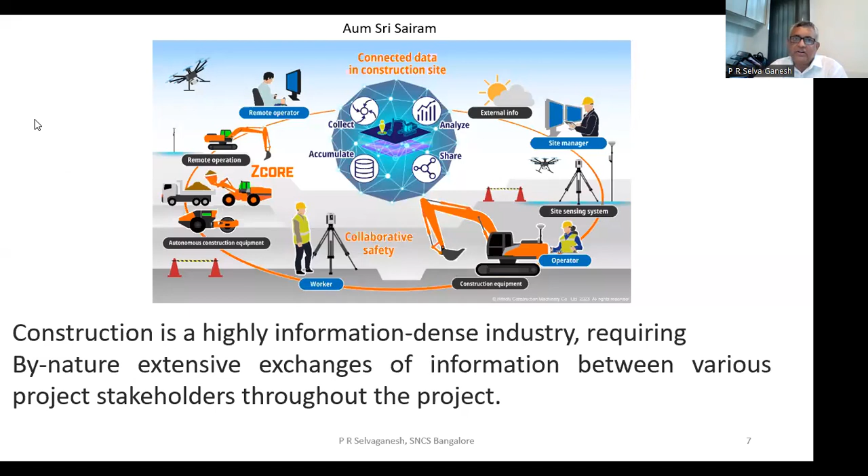It goes at a very multiple level. The idea of the owner who wanted the project has to be transferred to the last man doing this project. So there's a lot of communication, then finances and budget control, at various levels between various project stakeholders throughout the project, and a lot of information is transferred. This is where the efficiency factor of a project is measured, or it gets lost if not done properly.

Whether it is an architect, a client, an engineer, a contractor, a quantity surveyor or a finance person, the project very much relies on smooth communication between everybody.

Okay, this we know. Now I'm talking about BIM here. I'm going to introduce this technology individually, then take this lecture forward on how we can club together BIM and augmented reality, augmented reality and virtual reality, augmented reality and drone systems, and robotics. I'll first talk about these technologies separately.

A lot of paperwork happens, a lot of mailing happens. In that, BIM is a common platform, maybe cloud-based or whatever way it is. It's a multi-layered platform where all the information generated by various software—the structural engineer's software, the architect's software, the budgeting software by the cost accountant, and the monitoring software used by construction project managers, like MS Project or Primavera—various different software are integrated into one single software. That is the basic idea of building information modeling.

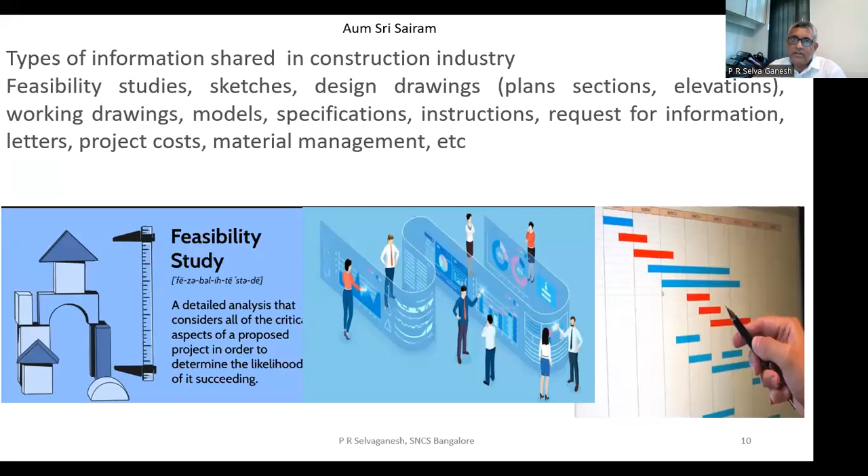In a project execution time, after giving all the drawings, they'll be asking a lot of request for informations, letters, managing the project cost, material management, like that. Lot of information is getting shared. If everything can come on a common platform in a digital form, it's very easy. All can approach it at the same time. That is the advantage of digitalization of any industry.

So what does good data exchange mean? What will happen if we do that? It will definitely give improved accuracy, administration tasks become less tiring, and improved knowledge transfer between the stakeholders can reduce a lot of change orders. Okay, I didn't mean this, I didn't mean that, making, breaking, all those things - time, energy, money - all these can be avoided.

Now, are we not using digitalized formats? Are we not using softwares? Yes, we are using softwares. Go to an architect's office, they will be using one set of softwares. Go to a structural engineer's office, they will be using another set of softwares. Go to the project site, they will be using MS Project or Primavera. Go to an accounts department, they'll be using Tally. Go to a quantity surveyor's office, he'll be using MS Excel. Everyone will be using their own software, their own template, their own unique ways of recording and presenting information.

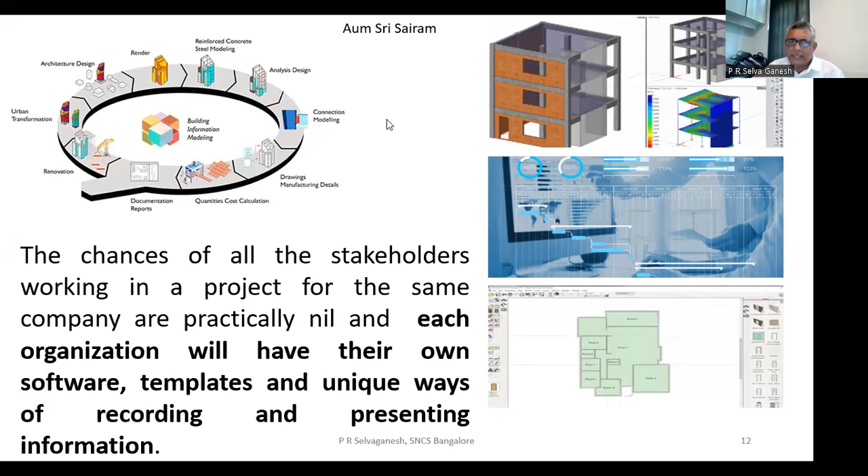This is again not a healthy practice. What if we can integrate everything together? That's what BIM is all about - bringing all the information connected to a platform, in a common software.

Now, what is this BIM layer about? Imagine I have a digital format of a project, where the feasibility study is also there as one layer, and all the drawings and specifications, the 3D models of that project are available in another layer. People who are familiar with AutoCAD know, when you make a 2D plan of a building, another layer can give all the electrical details, another layer you can give all the plumbing details.

Like that, there are many multi-layers. Imagine we have a software where the project feasibility study is there in one layer, all the drawings and specifications are there on another layer, the schedule is there on another layer, and the cost of the building is there in another layer - all in the same software.

And nowadays it is very much compulsory in European countries that the environmental data about any new project should be available, should be part of the project - meaning how much carbon emission this building is going to leave, or how much energy this building is going to draw from the environment, and how much carbon emission will be there from this building. That is very much a concern now because of global warming and other changes happening. So the products we use, the material we use, how much carbon emission this building is going to leave, and what will be their effect on the environment - it should be part of the design stage itself, part of the data available for the project itself.

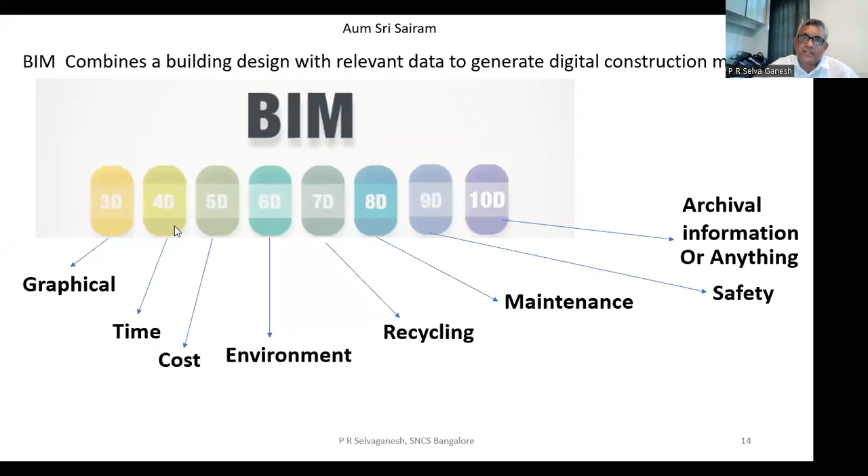Now that is about BIM, meaning building information modeling. Many informations getting integrated, that's BIM. That's one side. Now I am going to talk about another technology which is called augmented reality.

The definition of augmented reality is an interactive experience with the real world, where computer generated designs and drawings get connected to the real world itself. Now there's a thing called virtual reality we are all using already.

If you imagine a 3D presentation done on a computer on a big screen to the owners or other people, the architects come and present a building or project with 3D modeling on a screen, that is called virtual reality, because in the background they give an imaginary background, imaginary trees, imaginary people, and all those things. Augmented reality is totally different from that.

It's like virtual reality, but totally different, where the real site backgrounds are used. Wherever you are working in a project, just imagine, even before the construction has happened, the real site is brought as a backdrop, and the architect's design, the 3D model, is superimposed there.

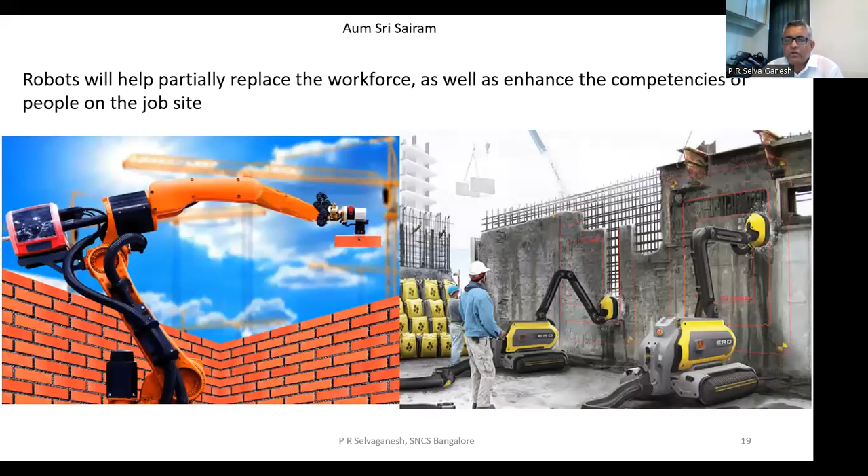See here, the robots are laying the bricks. The robo is doing the plastering or chipping. It is doing the drilling. It's doing the carpentry. CNC cutting machine is nothing but a robo-oriented machine only. It has all the x-axis and y-axis measurements. You give any drawing, and on a CNC cutting machine with wood or stone or metal or artificial material plus your own creativity, you can make wonders in the construction industry.

It is already there. Here you see a map with the light designed with a CNC cutting machine. Now, how is this happening? It is nothing but robotics only. The reference point - this is a huge board, a rectangular board, or it is multiple boards, 8x4 multiple boards. You are giving a drawing or a creative idea onto it. On the x-axis and y-axis, it goes and touches some point. It makes some holes and drills somewhere. It leaves some solid portion, creating an art piece.

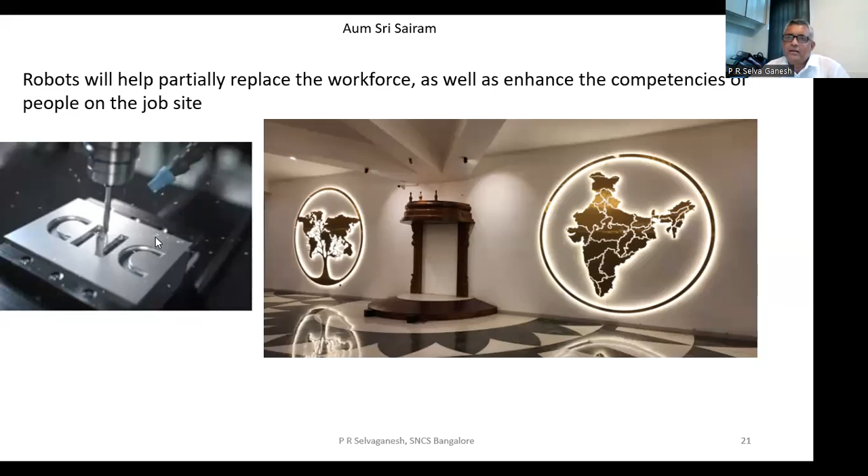That is robotics. Recently a light was designed for a stadium where it looks like a cricketer has become a light. CNC machines are possible nowadays. All marble inlay works, wood inlay works, and these things are all happening now through robotics technology in the construction industry.

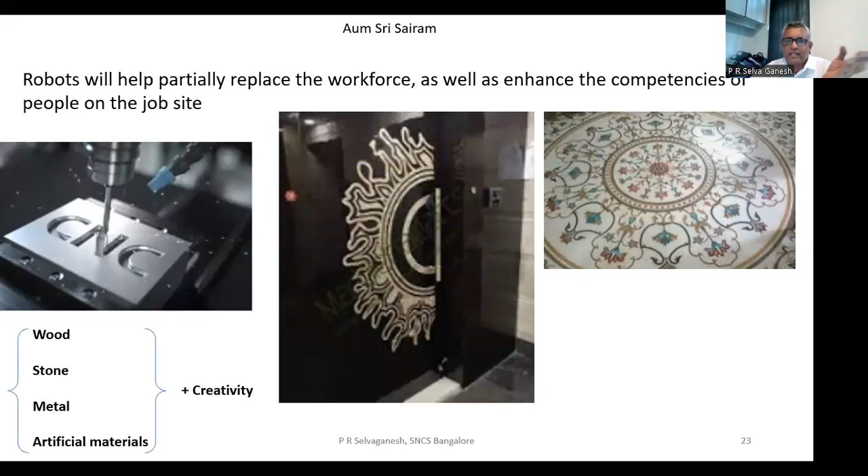Wood, stone, metal, artificial material, anything can be used. Use your creativity. It can even be used in normal construction and interiors. This is called a 5-axis machine.

Nowadays 3D scanners are available, costing about 12 lakh rupees. These are manual operated scanners that can scan our own body and convert that into a digital language. It gives instructions to the 5-axis and 7-axis machines. Give them a wooden block, a marble block, or a granite block, and it will make sculptures. This is robotics in the construction industry, which is already there.

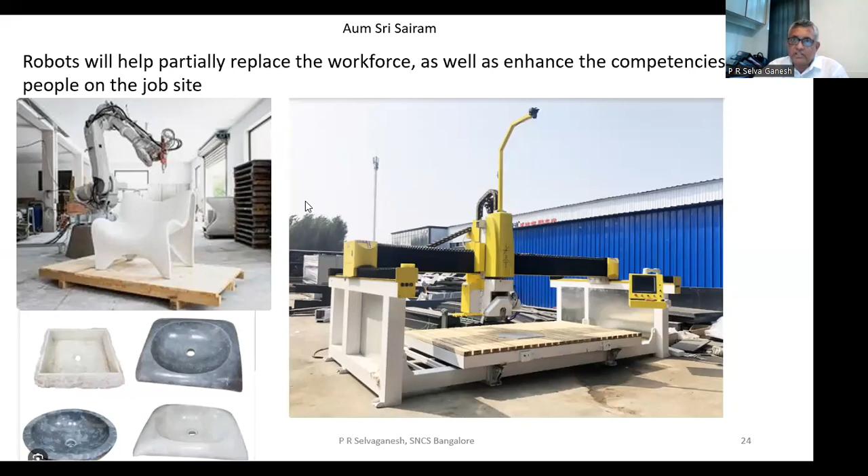Then there's drone technology, which can be very much a part of the construction industry. Land surveys are done with drones. Aerial surveys are done. Inspection at difficult areas where scaffoldings or cranes cannot reach, the drone can give you a live picture from there. You can monitor it from your mobile phone or a monitor, and definitely do inspections in difficult corners. These are all already there.

Now, the advantage of this survey, using BIM technology and drone technology, how to integrate. If I integrate this entire geographical map of this country, it can be digitalized. In BIM, we have layers. Likewise, in land survey also, we can have layers.

One layer can talk about who's the owner now and who was the owner 10 years back. All the revenue department records can be in one layer. The second layer is the utility of the land, whether it's for agriculture, and what was growing in it, coffee or paddy or whatever. Another layer can talk about the minerals available and the soil quality available. There's a lot of data about land survey that can be stored using augmented reality.

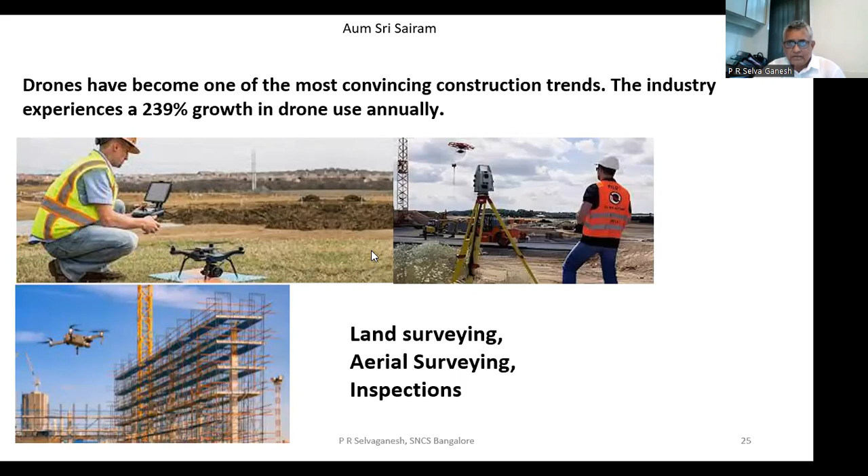Likewise, this augmented reality building thing I was mentioning can be used in marketing. You can show it to your customer. If you're building an apartment, he can feel his floor even before it is built, with the original finishes and what he'll be seeing outside the window. So it can be a marketing tool, it can be a tourism tool. All these things are possible with this technology getting integrated.

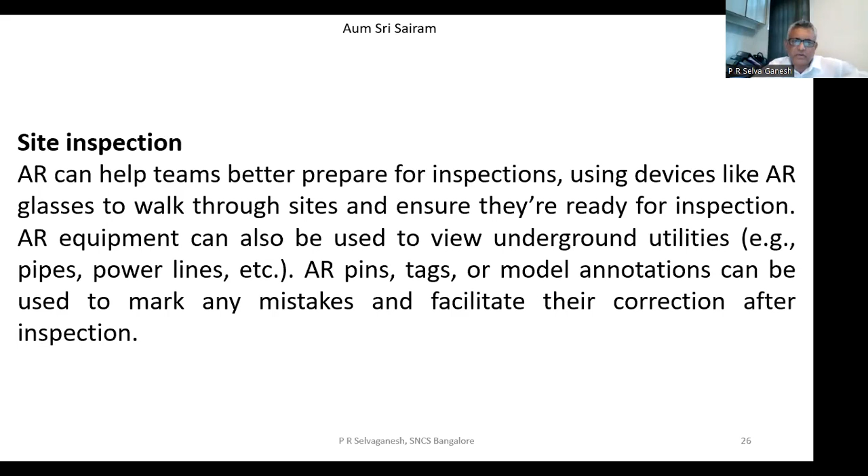For site inspection, AR can help the team inspect better. We have special glasses available nowadays. Using that, like in a cricket ground where the real ground is there and graphics are shown over it, I can use the same technology here in construction on my phone.

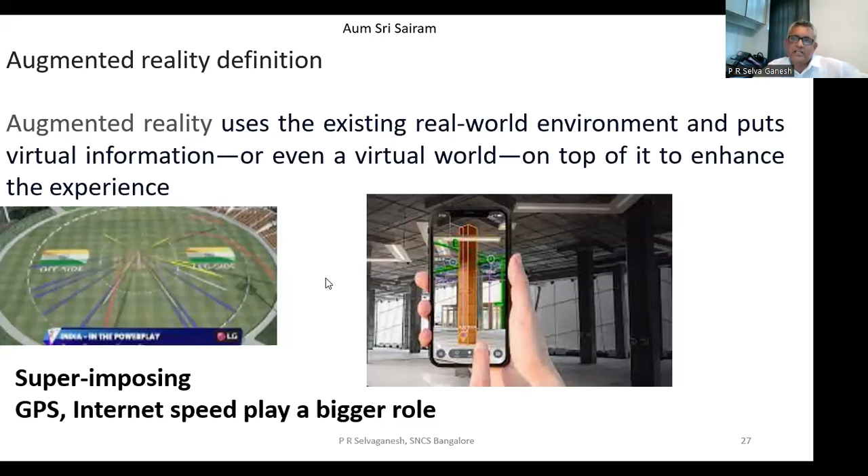The virtual reality column, as per the architect's drawing, is shown, and in the background I'm seeing the original column. It gets superimposed, and automatically the software will tell me whether the construction is done as per the drawing or not. Supervision becomes very easy, which I can do sitting at home. With extended retirement ages, more experienced engineers are available for the construction industry.

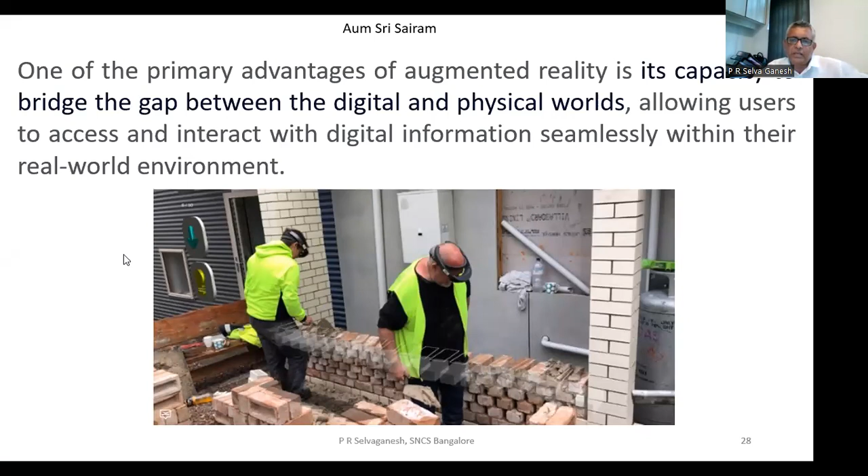It can be brought into mobile phones, computers, tablets, and other devices, and specialized hardware gadgets can also be developed, which is already available. You wear that, and in air you can see a 3D model.

First and foremost, I request the software developers to bring civil engineering software into a touchscreen model, not with keyboards and mouse anymore. Because to work with those things, you need technicians and training. If you can bring it to touchscreen technology, everyone can easily learn it and start using it.

Now, BIM and AR. It can already be used in construction project scheduling and tracking.

Imagine I have a 3D model and I'm wearing a gadget, with a step by step modeling created in augmented reality for a construction project. I can give scheduling details in one layer: from the day I start, what my first activity should be, like excavating in the northeast corner. Then for the third floor, this particular column, how many days or weeks I can complete it, and what materials I should arrange in advance. A construction project manager's main headache is planning in advance and in detail, doing every activity on schedule, and spending every dollar within budget.

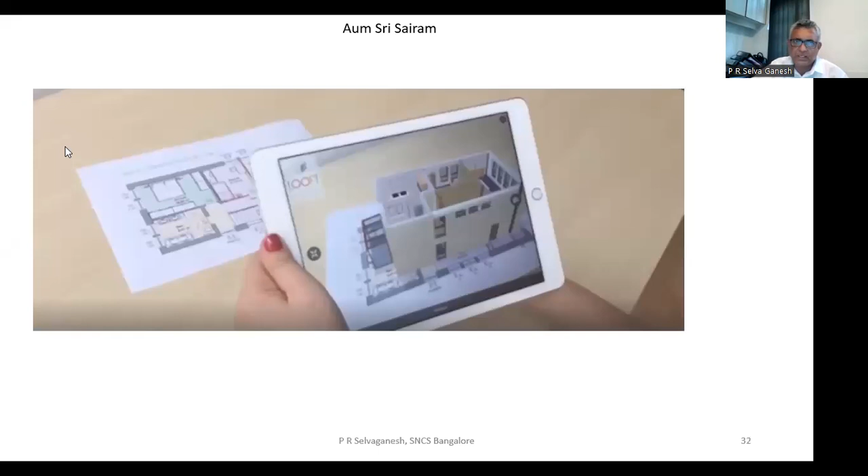From the project's conceptual stage, every detail is discussed on a 3D model with some gadgets. This is what we are talking about. We integrate this with BIM, with the drone, and with robotics.

If augmented reality has its own coordinates, and if that is connected to the robot, it will simply come and build the building itself. It will start from one particular coordinate as per the GPS system on the real site, and it will simply lay the bricks based on the information fed to the robot. So that connects augmented reality, BIM, and robots.

The building marking itself becomes very easy. Imagine the background is the original background, and I have to put a tower there—it will show me stage by stage construction, so that even before I attempt that building, I am aware how much money I should spend and how much time it will take. It shows what materials I have to mobilize from where, what sequence I'll be building in, and at what stage I need to spend how much, the cash flow.

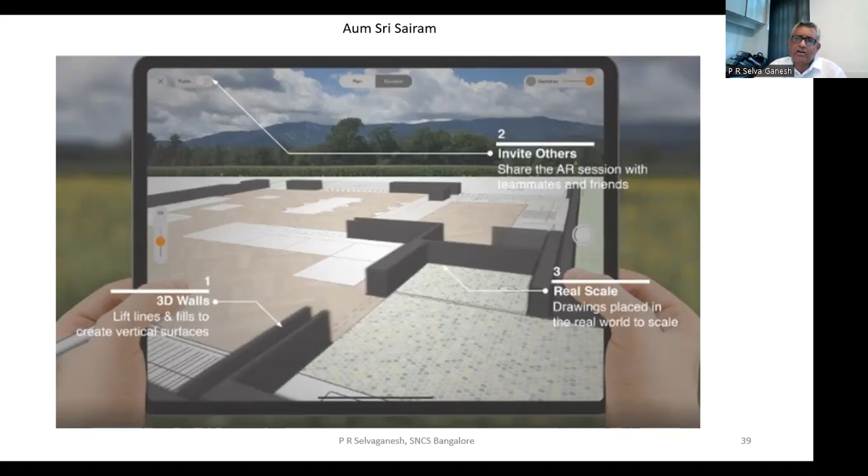You ask anything, all the information is available there. Here, the hidden things and equipment are seen in the augmented reality headgear.

DAQRI smart helmets are already available.

It's a matter of time. India is going to have all these things at the construction level. All the workers will be wearing this, we engineers will be wearing this, and we will be approaching the cloud. If internet speed stabilizes all over the country, that's going to help us in supervision, training, and everything.

I already said this is a tool for training. These helmets can be used for seeing all the layers. Now, there are some softwares available, but it's not customized the way I gave lecture in this webinar.

These are all some softwares available with a little bit of advantage and disadvantage of their own. Like our MS Project and Primavera, they are basic, very good software available, but still not up to the mark when it comes to customization of our own projects. No software can be perfect for this. So that's where maybe the software teams will start working. App development has become so easy nowadays, so the customization of these softwares is also going to become very easy. Both put together, every site, every project can have their own softwares.

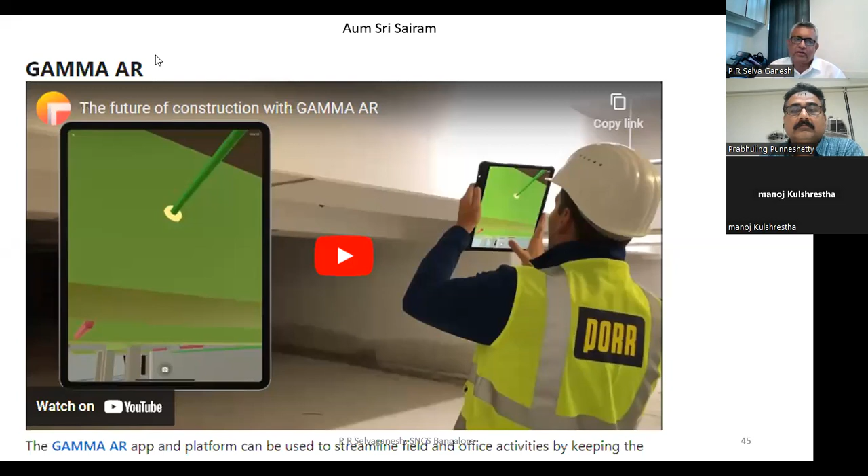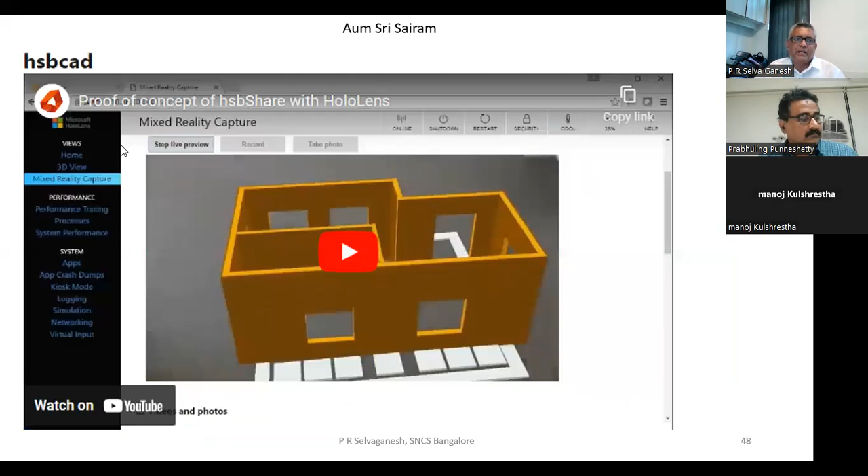Now, what are some of the softwares available in the market? I want to bring it to your notice. Gamma AR is one software. The Wild is another software available. Auxiliary AR is another software. And hsbcad is another software. These are all the softwares which are already available.

Now, some little past information. The first AR technology was developed in 1968 in Harvard, and even Switzerland started this. Then in the year 2000, BIM and augmented reality were connected and done in the lab, but it took a lot of time to reach the real construction site in European countries.

There, if you want to get a municipal permit for a building, all these things are stored in multi layers, including setbacks and other rules integrated here. As one layer of BIM with augmented reality, it becomes very easy for municipal authorities to see. So there is no bribe, no corruption, nothing. It's all software oriented, and everything will be fine as per the town planning. That is the advantage of this technology.

This is about integrating all these things, BIM versus drone. I mentioned land survey, air survey, and recording all the land records, and BIM versus AR used in building construction and other project constructions.